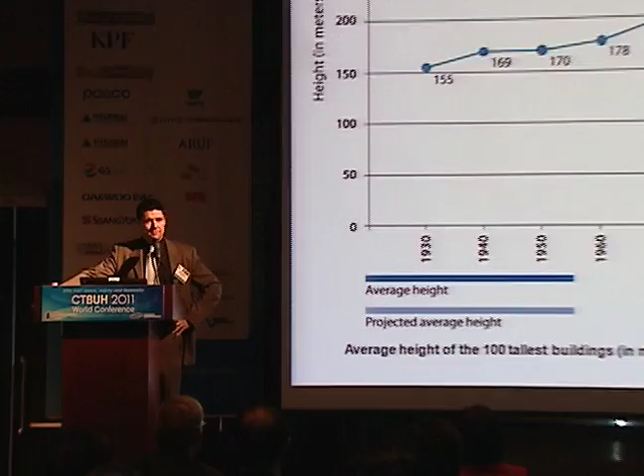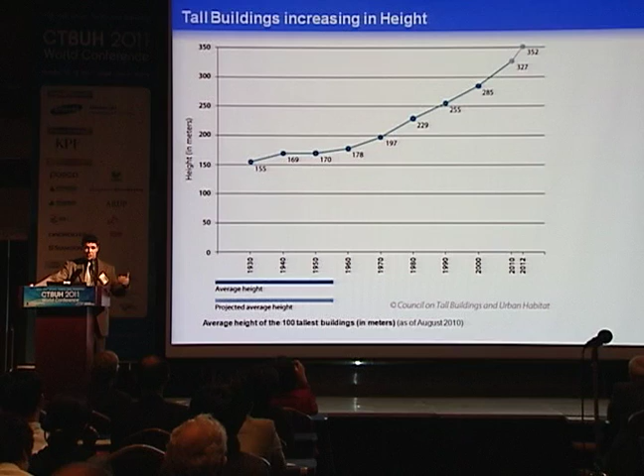So the agenda for the presentation. First of all, I just want to put this in the context of tall building trends and sustainability. Okay, two things that we all know, but here's some data. Number one, tall buildings are getting taller. That's the average height of the 100 tallest buildings per year, plotted since 1930. So we can say that the average height of the 100 tallest buildings in the world has more than doubled in that period. And we all know that the world's tallest is getting taller, but actually to double the average height of the 100 tallest buildings is a pretty significant thing.

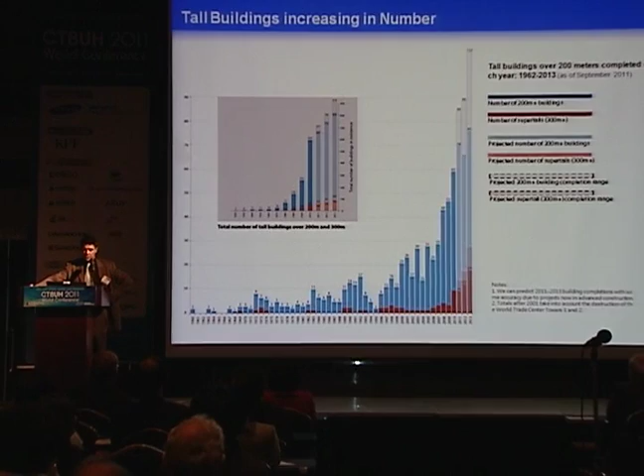Tall buildings are getting taller. There are more of them. These are CTBUH graphics, CTBUH research. That's a graph of the number of 200-meter tall buildings built every year since 1962. And actually the red shows the number of 300, so supertall buildings built. So you can see that we have been in and are still in an unprecedented period in mankind. We have never seen the amount of tall buildings that have been built and continue to be built in the last 10 years.

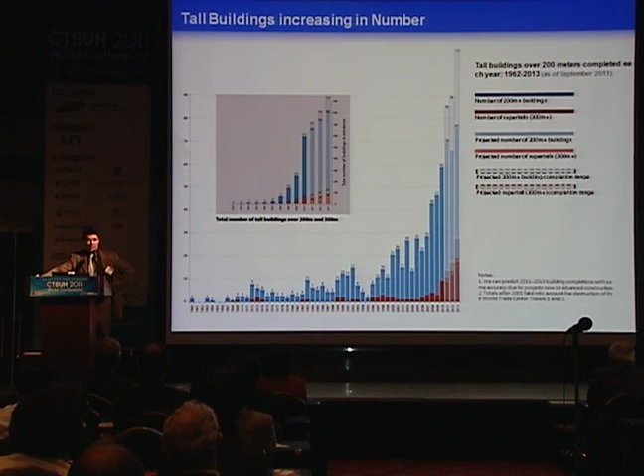And by the way, when we started predicting this about 3 years ago, we started to show a drop-off from about 2011 onwards because of the effects of the economic recession. We now no longer believe there will be a drop-off. Not only is it going to continue for the next 3 years, we believe it's going to continue after that as well, climbing in the way that we're seeing, because of the huge amount of projects that are coming online in Asia and predominantly China.

However, the age of skyscrapers is at an end. It must now be considered an experimental building typology that has failed. That's a quote from 2005. And I think probably most people in this room and in this entire conference are pretty pro-tall buildings. And I would count myself amongst them, not surprisingly.

But there's also a lot of bullshit around tall buildings. A lot of bullshit. And let me tell you that if anyone tells you that they're designing a carbon-neutral tall building or a sustainable tall building, they're actually talking bullshit. A tall building is not a sustainable building type, categorically. It costs more energy to put those materials up in the sky than it would in the low-rise realm. As a single building entity, a tall building is not a sustainable building type. It becomes sustainable when you consider the bigger picture, which is essentially beyond the single building.

We have to do all that we can to reduce the energy consumption in tall buildings. And we've just seen that with Kathy's presentation. Incredible. But that doesn't make it a sustainable building in itself. And this, I hear it daily. Carbon neutral tall buildings. We are so far from carbon neutral that it's not really even worth mentioning the term yet. And even if you do mention the word carbon neutral, you're only talking about operating energy. You're not talking about the embodied energy in the materials to build the tall building in the first place.

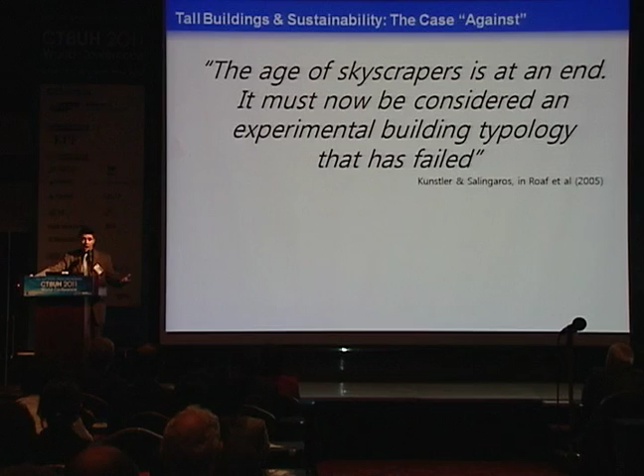So we are kidding ourselves by saying and telling our clients and the public and other people that we are on the cusp of creating sustainable tall buildings in themselves. And there are very strong arguments around the world for why tall buildings are not sustainable. I have whole lists of them, which I'm not going to go through now.

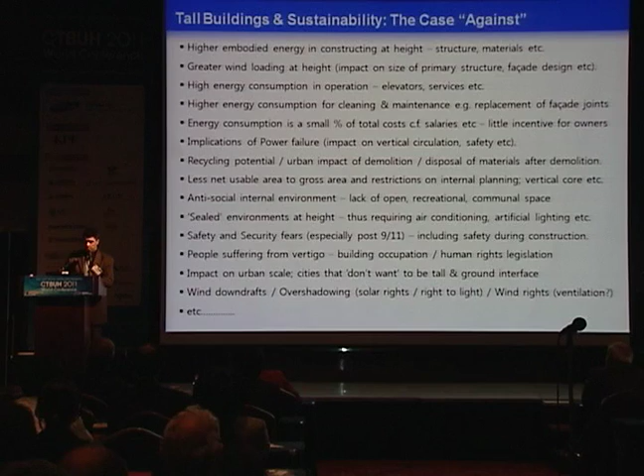They only become sustainable when you put it in the bigger picture, and the bigger picture is about cities. It's about urbanization. It's about the fact that there are 200,000 people urbanizing on this planet every day. That means we as a species need to build a new city of 1 million people every week to cope with this urbanization. So where do these people go?

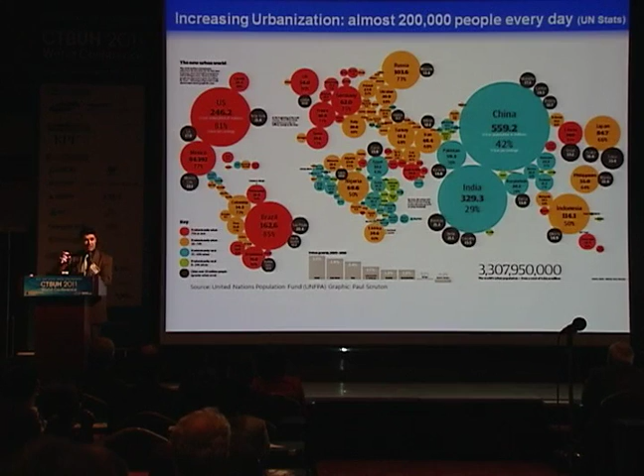And then on the other end, we've got Hong Kong. And why is Hong Kong one of the most sustainable places on the planet? Because of mass transport. Because you step outside your door and you have 6 or 7 options of moving around the city, none of which involve getting in a private automobile, or very few.

So I wanted to put that in the context before I talked about natural ventilation, because I just feel frustrated by this greenwash. I just don't think we are helping ourselves by not being upfront. And the thing that's great about Kathy Yang's project is that's the first time I've actually seen data of that nature put out there in the public realm. The projects that are investing for better environmental performance, no one's releasing the data. So there's a whole problem in the industry.

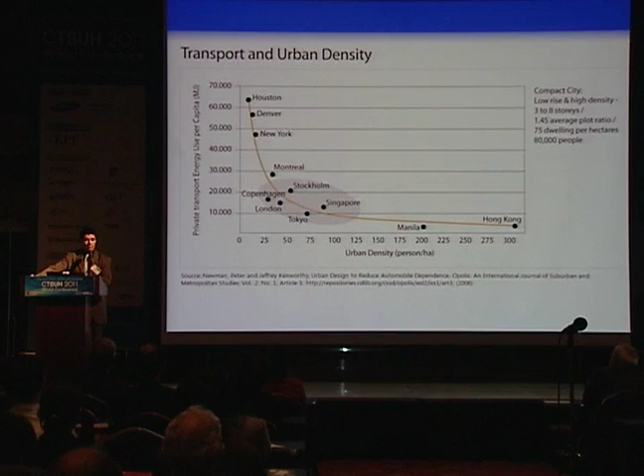Do those wind turbines on the Bahrain World Trade Center work? On the Strata building in London, do they work? Does anyone know? Nobody knows. Or maybe the people that do know aren't releasing the data.

Sorry, I'm going off on one.

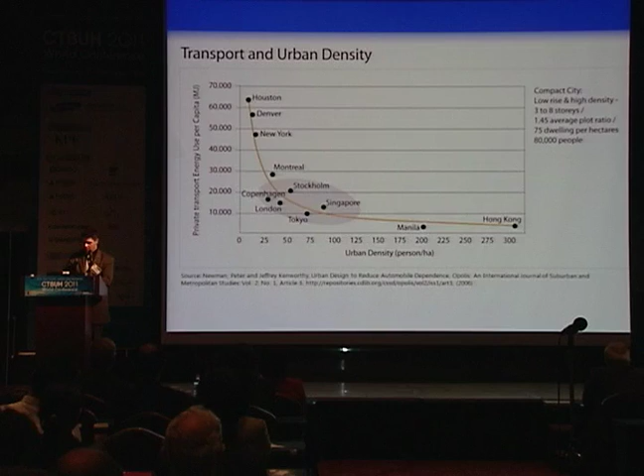Okay, so, by the way, urbanization, tall buildings, is not just about developing countries. It's not just about the 200,000 people in countries like China, India, Brazil, Turkey. It's also about the West, because the changing social demographics mean that we need far more housing than we've ever needed. In my country of the UK, we need 200,000 new homes to be built every year to cope with the supply that's needed. Why is that?

People are living longer. People don't like each other. Divorce rate is up. More single family housing is needed. So for those who think this is only an issue for the East, it's not. It's for the West as well.

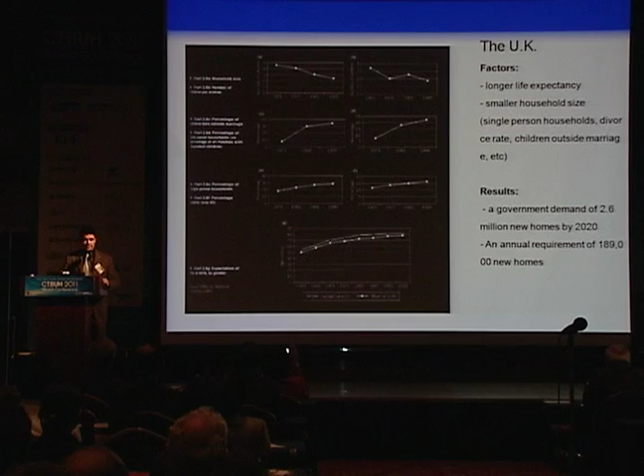Okay, calm down. Right, natural ventilation, principles and strategies. So that's a bit of a precursor to say that despite that, we need to do the best that we can to reduce energy consumption in all buildings, and especially in tall buildings. And actually, Dennis Poon showed a figure this morning that 45% of energy consumption in tall buildings is in the HVAC systems. I think in Kathy's building it was 53%. So we're talking 50% of the energy consumption going into heating and ventilation.

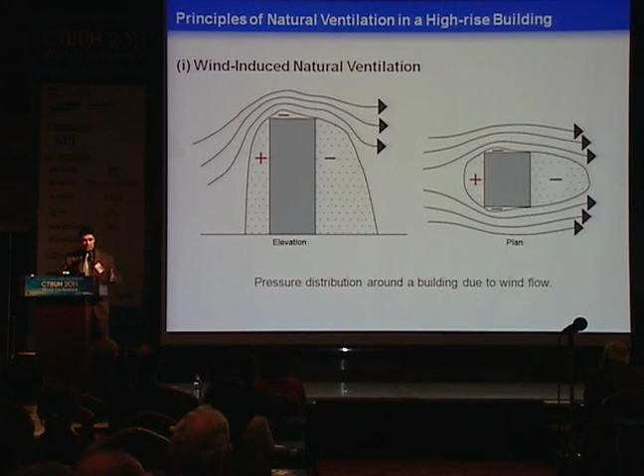I'm not going to go through this too much. Principles of natural ventilation. Natural ventilation usually falls into one of two categories, usually both at the same time. Wind-induced natural ventilation: ventilation is induced by a movement from positive to negative pressure. So wind-induced natural ventilation or buoyancy-induced natural ventilation. Heat rising.

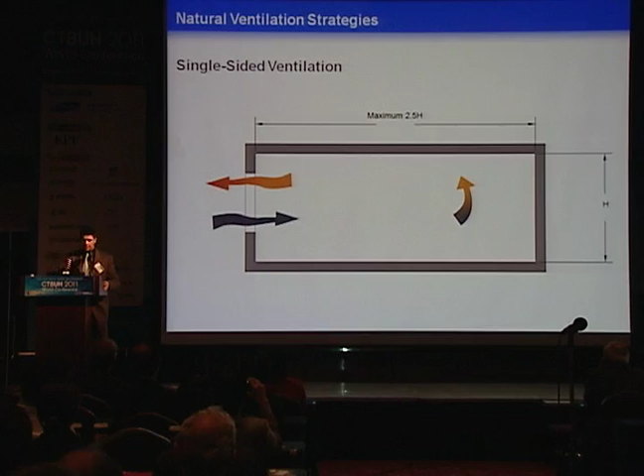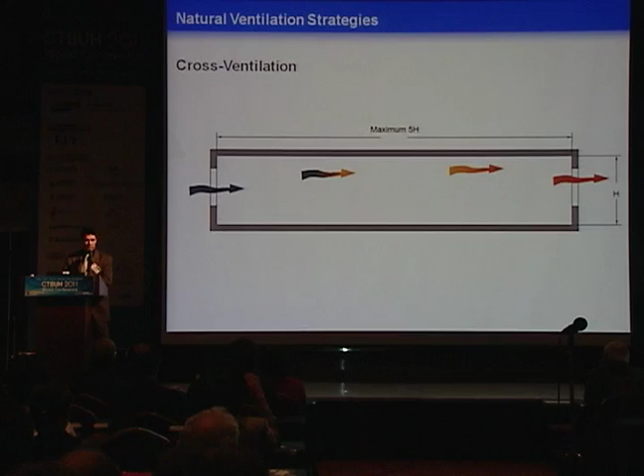And the basic principles of natural ventilation, single-sided. You can naturally ventilate a single space if the depth from a window is 2.5 times the height of the room. If you cross-ventilate, you can go to 5 times the height of the room. And then we have the principles of stack ventilation. Hot air rising and bringing the cooler air through.

I think it's worth saying that there are 3 generic strategies for natural ventilation. Or 3 objectives, if you like. One is conditioning the environment, i.e. the temperature and the humidity of the air. A second strategy is conditioning the occupant, i.e. blowing air across them, which is not the same. That's to do with evaporation of the skin and various other things. And the third strategy is conditioning the building, the fabric.

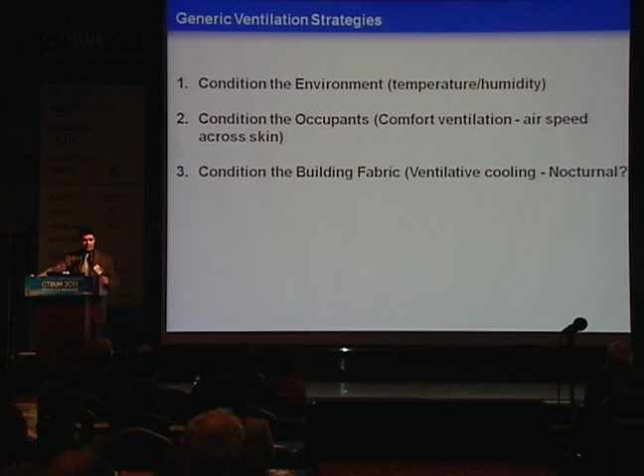Which usually translates into ventilative cooling, i.e. nocturnal cooling. What are the benefits of natural ventilation? By the way, this report focuses on case studies, and I'm going to show some case studies in a second. But the benefits. So I broke these down.

Tangible benefits. Obvious one, reduced operating energy. So we want to cut the energy consumption in the building. Number 2, reduced embodied energy. That means, if you are able to take out all the mechanical plant in the building and all the ductwork and all the rest of it, there's a huge saving in embodied energy. However, there's a question mark against that, because natural ventilation just doesn't happen without a whole other set of systems, which we're going to look at in a minute.

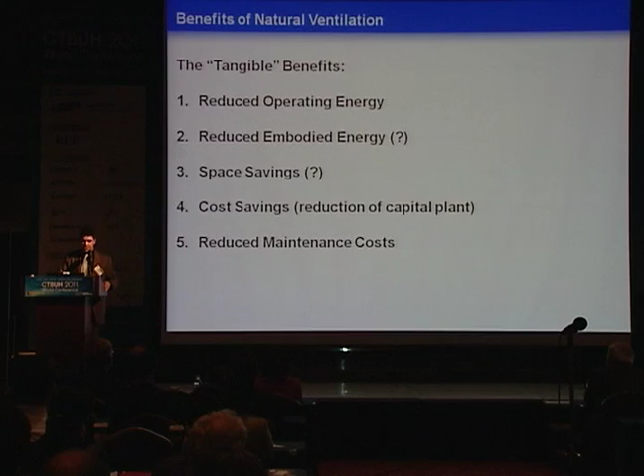Space savings. If you're reducing the amount of MEP floors, then again, that can have a space saving. But there's a question mark against it. You take out the plant, potentially there's cost savings and reduced maintenance costs. And these are all very valid points. But actually what interests me more is the less tangible aspects.

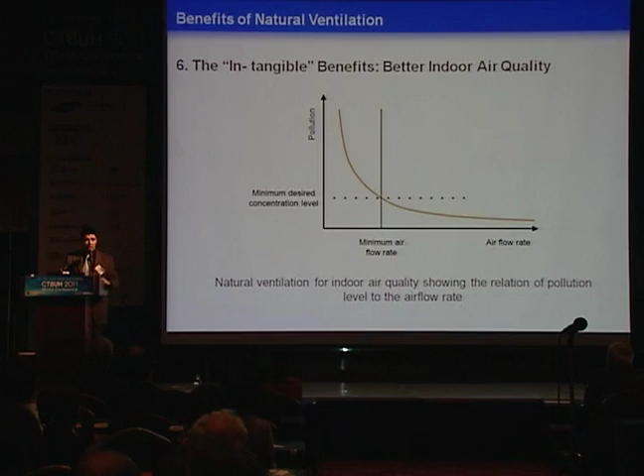For example, the impact of better indoor air quality than mechanical ventilation, because that impacts this, which is higher occupant productivity. And we are only just beginning to realize this in the industry. And this is one of the barriers to sustainability.

And it's getting better, but if you go to a client and say, I can save you 20% of your energy bill, the client will think, well, the energy cost of running my building is 0.5% of my total operational costs. But if you went to him and said, I can save 20% of your staff bill, that makes a bigger difference. And this is now becoming recognized, that approaches in sustainability, in particular making a better, greener, healthier environment, affect occupant productivity.

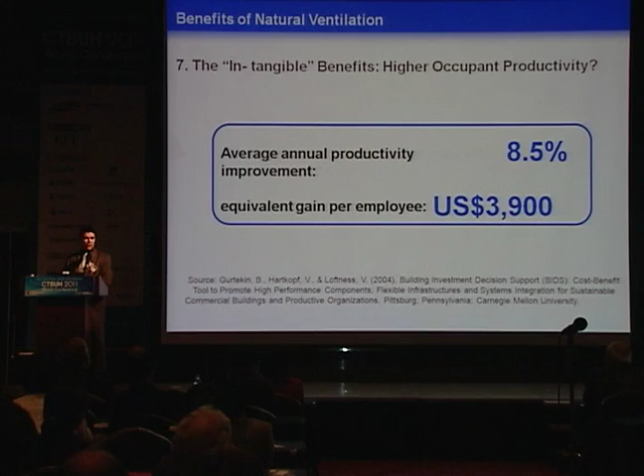And this is a little study that was done in 2004 that suggested that by creating a better environment, that impacted productivity by 8.5%, which was equivalent to a gain per employee of almost $4,000. Now, if you're multiplying this across thousands and thousands of employees, that makes a difference. Let's look at some case studies.

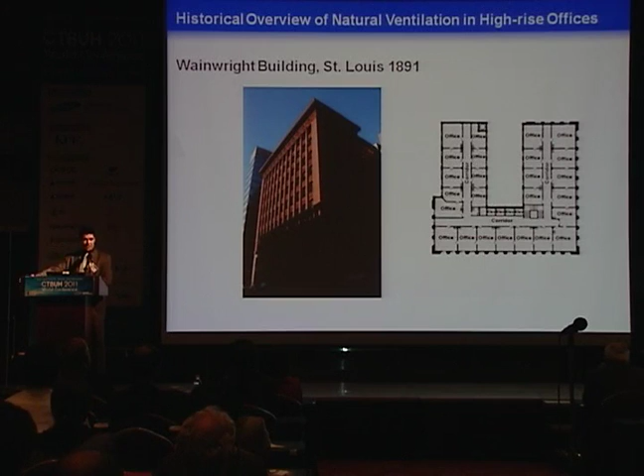Oh, historically, I just wanted to say, buildings had a natural connection with their environment. That's why, if you look at historic buildings, they had relatively narrow floor plans. If you wanted to ventilate the building, it involved the very arduous technical task of opening a window. And then even when they got deeper, they usually had a light and ventilation well in the middle.

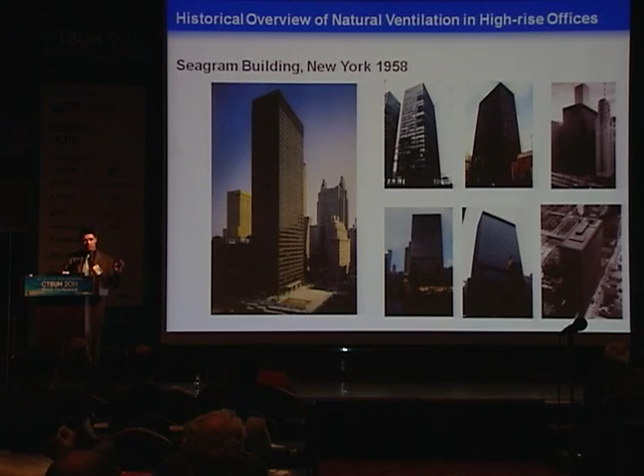And then it kind of changed with this building, with this architecture. The pinnacle of modern architecture, modernism, the ability to divorce architecture from its environment because of cheap energy. And in many respects, I think modernist architecture has been the downside, especially of tall building architecture, for 40, 50 years. That moment in time where we no longer had to consider the environment because we had the power, quite literally, to do whatever we wanted to.

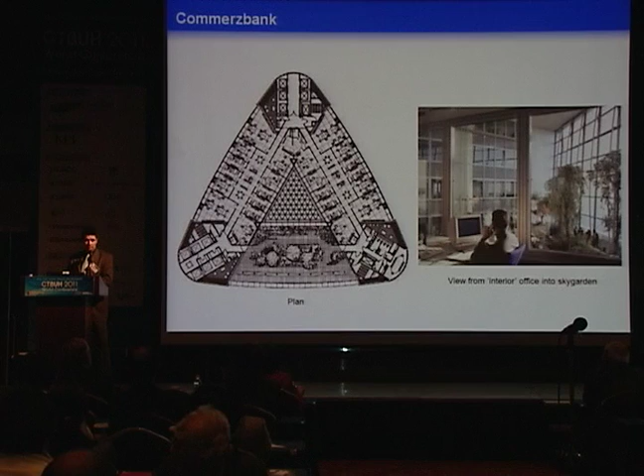Okay, so let's start in 1997 with the Commerzbank. I'm sure you all know this building. By the way, this building was driven by a German regulation saying that you needed to be maximum 7 meters from a window. So we don't need to get too altruistic about this. It was actually driven by legislation, a lot of it. But the ventilation strategy for this building, that doesn't work. Okay. The ventilation strategy for this building is very simple.

The outside offices around the perimeter are ventilated directly from openable windows at the exterior, and then the interior offices are ventilated via a 12-story high central atrium being fed from a series of sky gardens which step up around the building. So you can see that in these diagrams here.

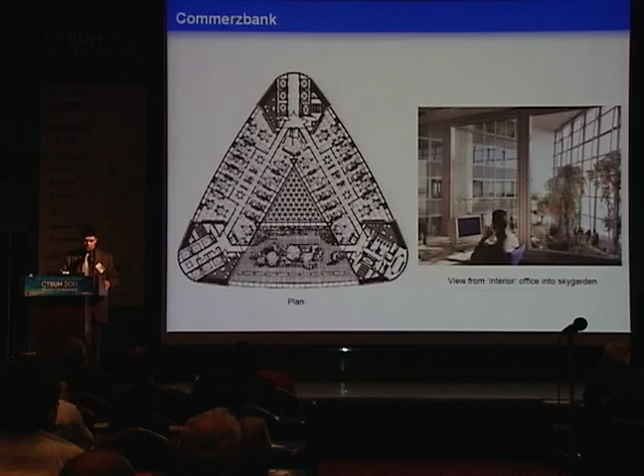If we just go back to that, you can see that what we have is, the building is divided into 12-story villages, and within these 12-story villages are 3 sets of 4-story sub-villages, such that you always have a sky garden, but the sky garden steps around in 3 places on any 4-story level.

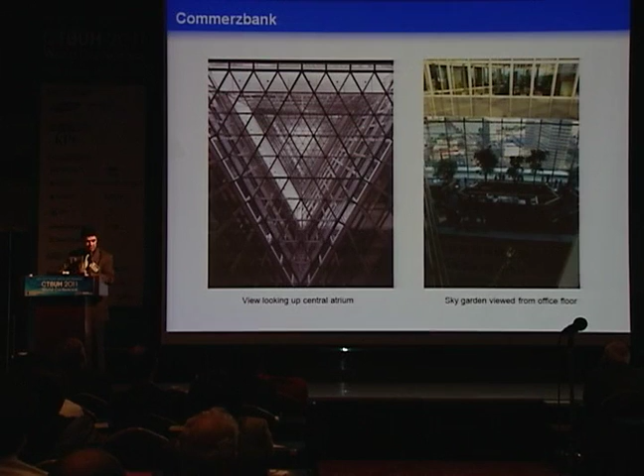And then there's a central atrium, which is capped every 12 stories. So you can see the ventilation strategy there. The outside offices are ventilated directly from the facade, and this sky garden into the central atrium is pulling the ventilation from those inner offices. The corridor in the middle is mechanically ventilated.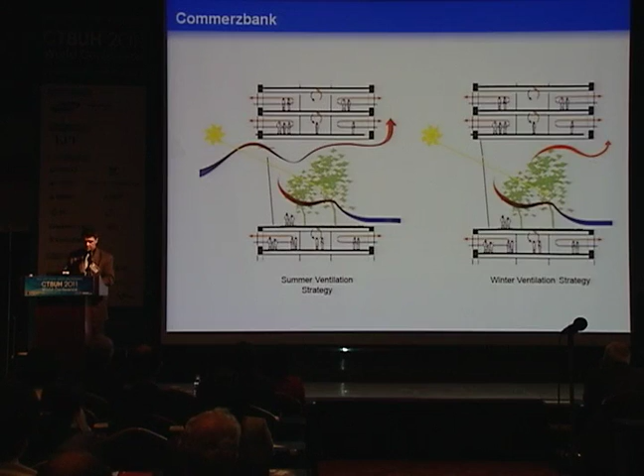So there's the outside skin. It's actually a double skin. We're going to talk quite a bit about double skins in these cases. Oh, I forgot to say, the first 4 or 5 case studies that I'm showing are all from Germany, and they all employ double skin. And you know double skin? Once you've seen one, you've seen them all. Well, you haven't. I'm going to show you 4 double skins which act completely differently.

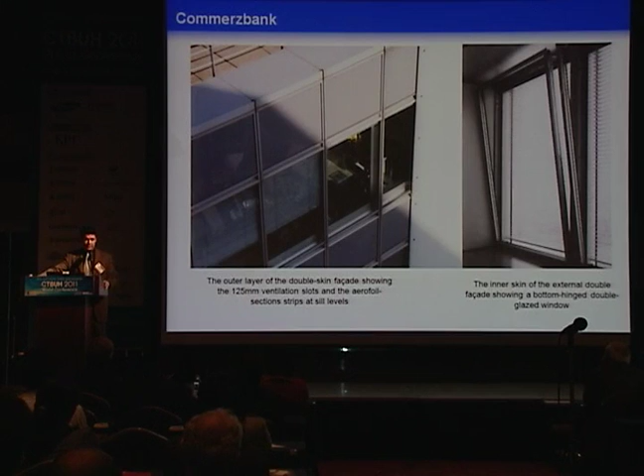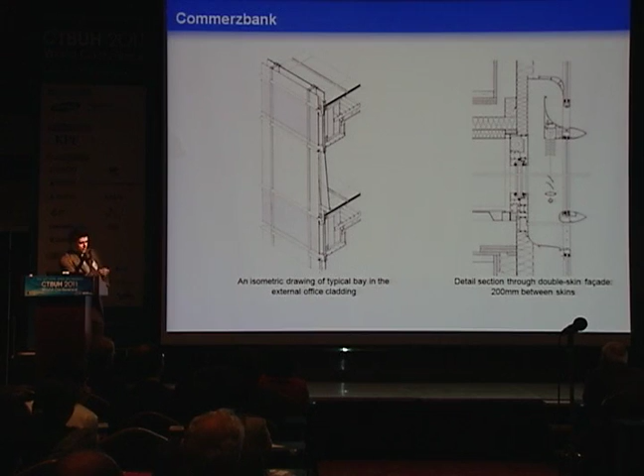So this was one of the most simple ones, 97. You can just see there. There's an outside skin, and then the inside skin just hinges forward, just pivots forward. You can see that in the diagram on the right. So the air is actually fed through these fin devices here into the void, and then the inside leaf just pivots open. In extreme conditions, it's all closed off and mechanically ventilated.

And by the way, I wanted to say that I do not know of any naturally ventilated office building in existence in the world today. If anyone else does, please tell me. There are no naturally ventilated office buildings. This is not one. They are all hybrid buildings. Hybrid means it has the ability to be naturally ventilated or mechanically ventilated.

Well, all those savings that I talked about in the first place, the saving on space and cost and embodied energy and all the rest of it, is nonsense. Because if you don't trust in the natural ventilation systems, then you are perhaps reducing the plant, but you're not even doing that because it needs to be sized on the worst case scenario, which will be a hot day in summer.

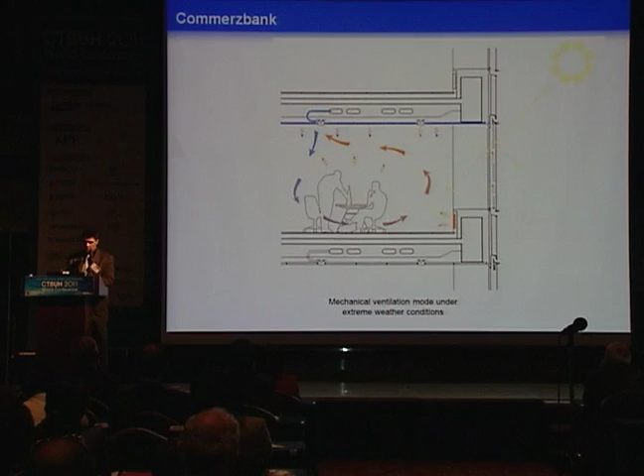So even these buildings that are brave enough to really employ significant strategies for natural ventilation, they all have the mechanical plant ready to kick in on the hottest day. So we're not really seeing this pushed to the point that it needs to be, where we can create a 100% naturally ventilated tall office building.

Okay, and by the way, I'm meant to be talking about the report. So the report goes through the case study, presents it, and then analyzes it in terms of strengths and weaknesses. So the strengths of this building: they move the cores to the outside to give flexibility of the interior space. Pretty radical approach. Most buildings have a central core.

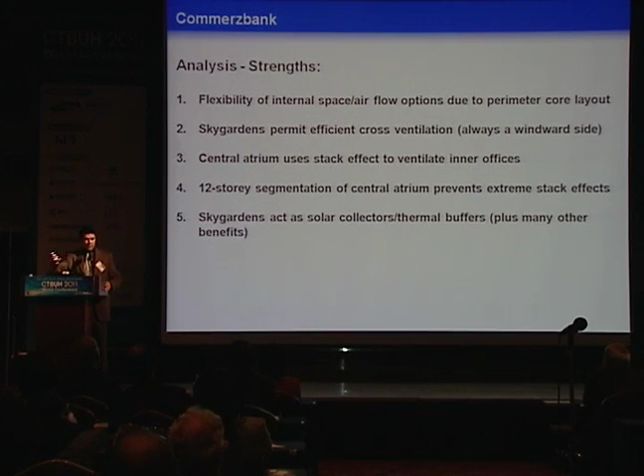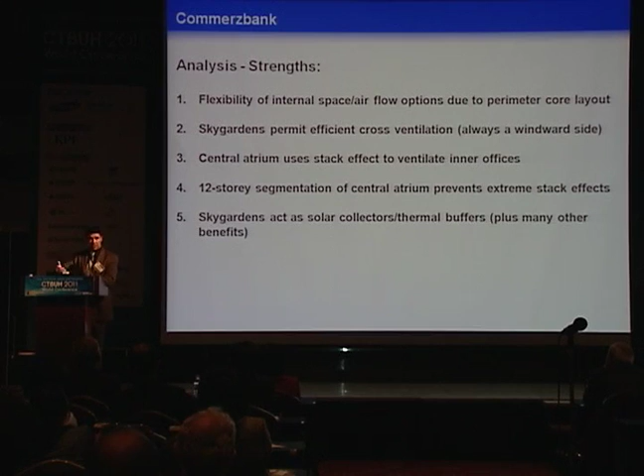Use the sky gardens to permit efficient cross ventilation. In other words, you always have a sky garden on a windward side, because that central atrium is being fed by 3 sky gardens on 3 faces of the building. So whichever way the wind's blowing, it's always driving at least one of those sky gardens. It's using the central atrium as the stack effect to ventilate the offices, yet the 12-story segmentation prevents extreme stack effects, and the sky gardens are acting as solar collectors, thermal buffers for the space inside.

Possible limitations: loss of space. Think about those sky gardens, the amount of space that those take up. I'm putting my developer's hat on now. The configuration doesn't specifically address the prevailing wind or sun. There could be uneven pressure distribution and ventilation in the offices, and possible overheating of the double skin space.

1 story high. So this double skin facade is a zone at the edge of the building. The floor comes through on each floor. And basically what it is, it's a big horizontal duct all the way around the building. And in the place where the corridor comes across, the single-story void of the facade comes into a duct below the floor. So it is a continual horizontal duct all the way around the building.

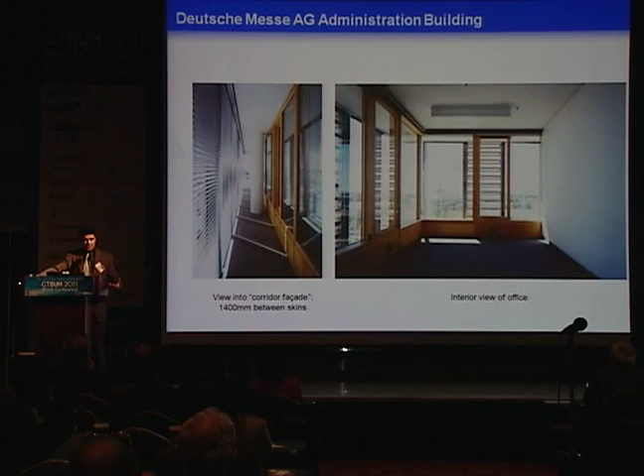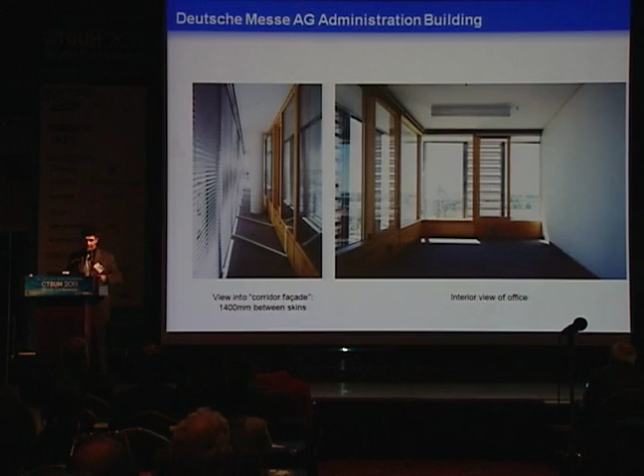It's quite nicely designed. So air comes through the facade, through louvers in the facade, into this space, and individual occupants decide if they want more of that ventilation by basically opening these sliding doors to let more air into their space. There's a mechanical system in here, which you'll see through these vents. And if it's running in a mechanical mode, or part mechanical mode, the opening of those sliding doors automatically cuts off the mechanical supply of the ventilation.

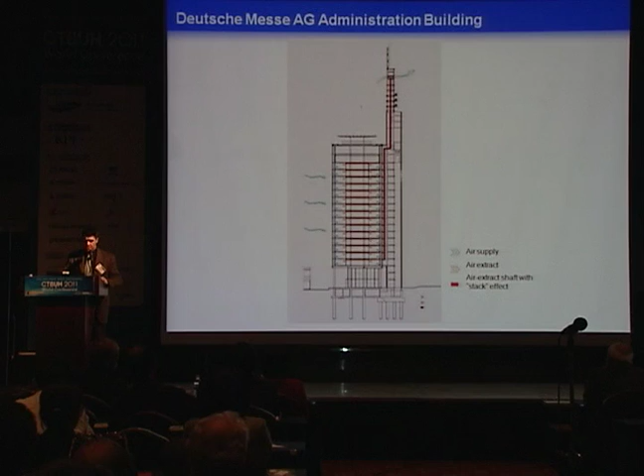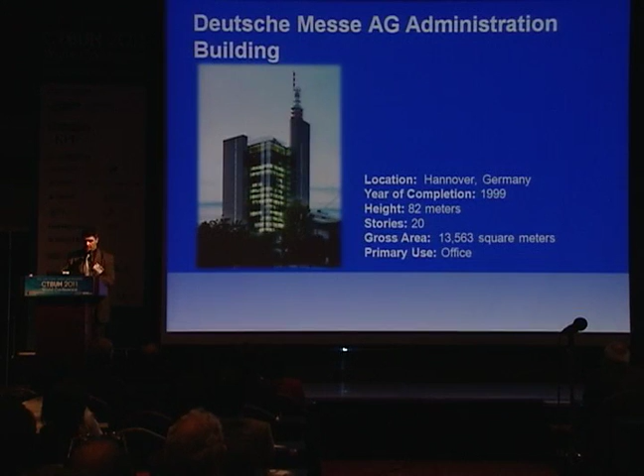And the other nice thing about this tower is that it uses the stack effect in the circulation towers to exhaust the air. So we've only spoken about the supply coming in through the ventilation and then through the openable, slidable doors. But it's then drawn through the building and into this tower. And that tower extends higher than the building and is drawn off through the stack effect acting in that circulation tower. So you see the vents on the outside of the building.

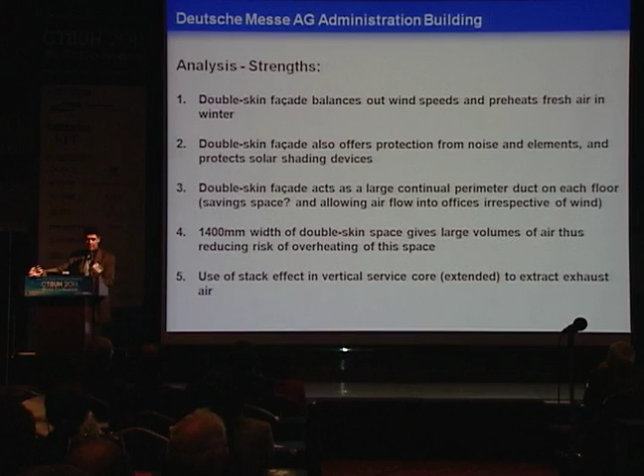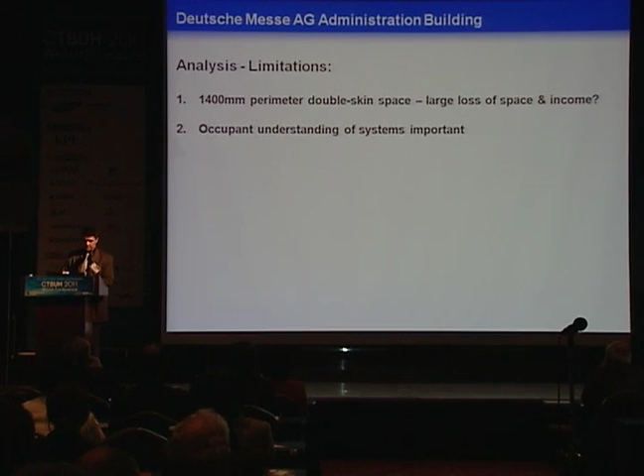And you know what, I'm going to speed up. But hey, there's a whole bunch of good things about double skin facades. They protect from the noise and the elements. They temper the space. They do all this. But it's still 1,400 millimeters of non-usable space on the outside of the building. That's a hell of a lot of space. And also, occupant understanding of the systems is pretty important for operation of that space.

Deutsche Post, around the same time, again in Germany, a double skin facade, but a different double skin facade on the north and south side of the building. So on the south side of the building, where the solar gain is higher, you have a kind of shingled facade, where the air is coming in underneath these overlaps in the facade. And by the way, this is not a single story. This facade now is 9 stories high, so it's broken down into 9 stories. So another double skin facade, but working in a completely different way.

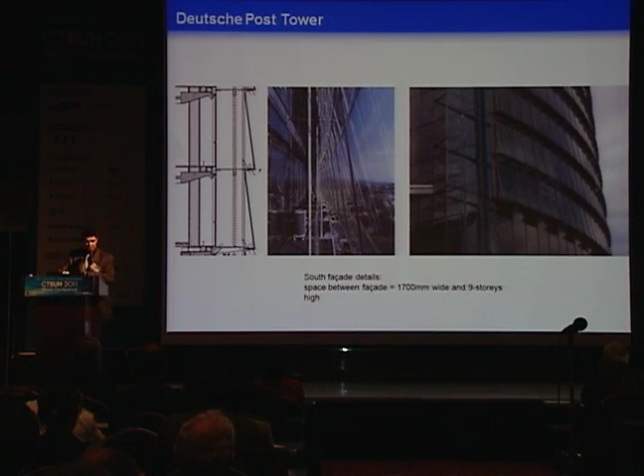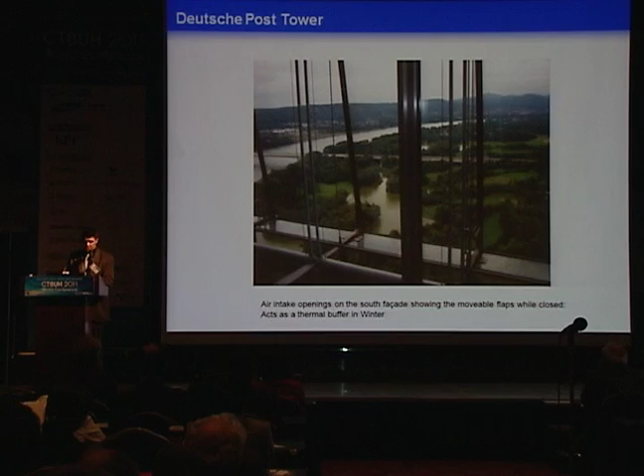The air is drawn into the facade differently on the north and south sides of the building. So this is the north side, where you'll see it's a flat facade. It's not shingled. It's not overlapping. This is back to the south side. So those glass horizontal flaps lift up there and can be controlled to let greater or lesser air into that tempered space and then being drawn into the offices. There's a section through.

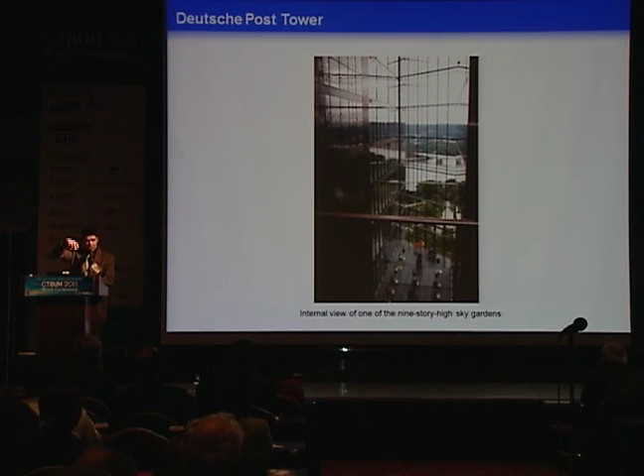And then it's being extracted through these 9-story sky gardens, which are stacked up on top of each other at the center of the building, which are then in themselves naturally ventilated. So you can see there the 9-story sky gardens, which are acting as big exhaust ducts, really.

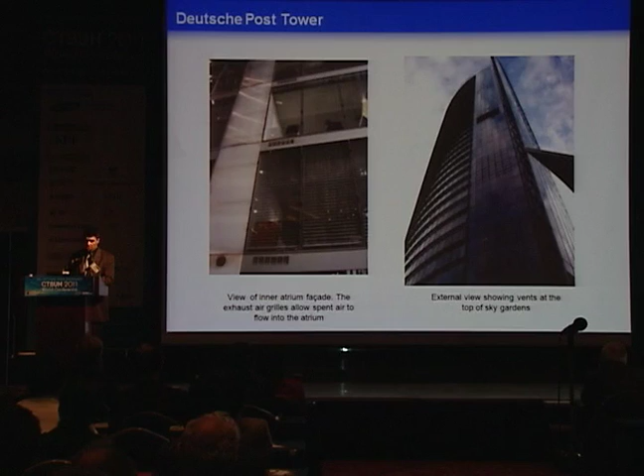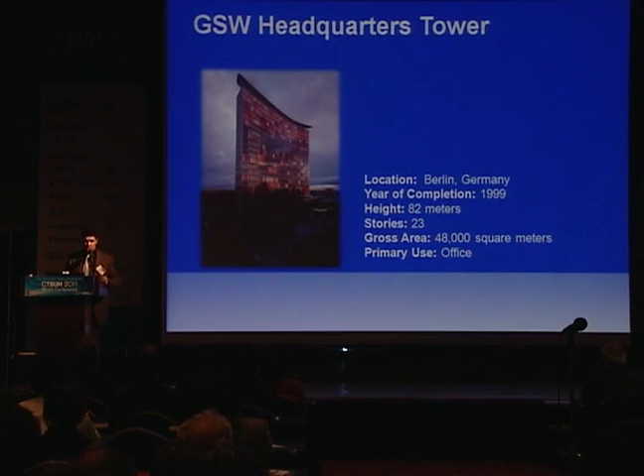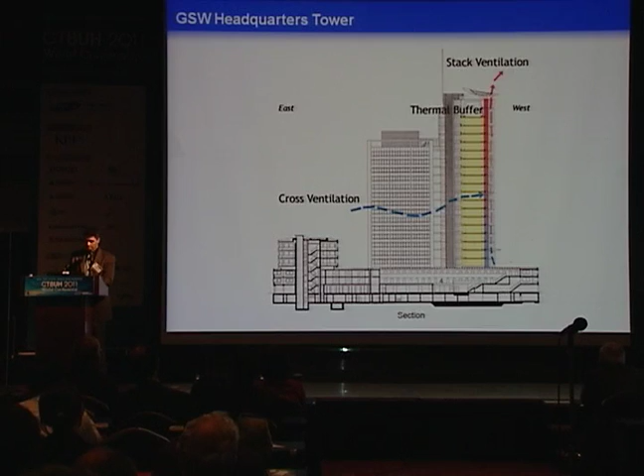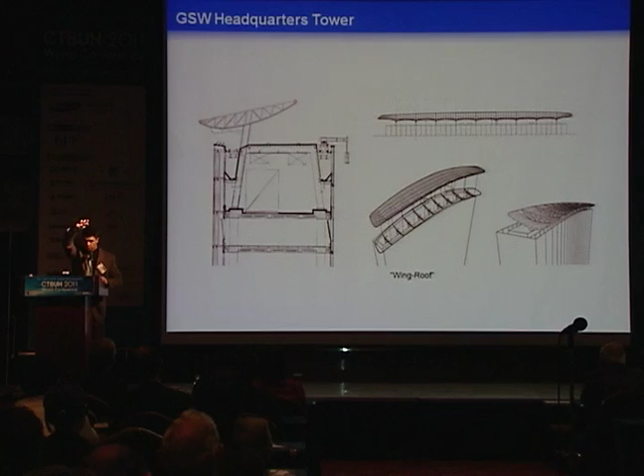The next few examples, I just show you some things that are different. What I'm trying to show you is that there's lots of different strategies for naturally ventilating tall buildings, even with double skin. So the GSW tower in Berlin, that west-facing double skin facade, now the cool air is being drawn in from the other side of the building, and it's acting as one big stack effect. So they're encouraging the sun to come into that space and bring the stack effect out through the top. There you see that. They then even put this wing roof on the top to attenuate the wind pressure, bringing the exhaust air up through the facade.

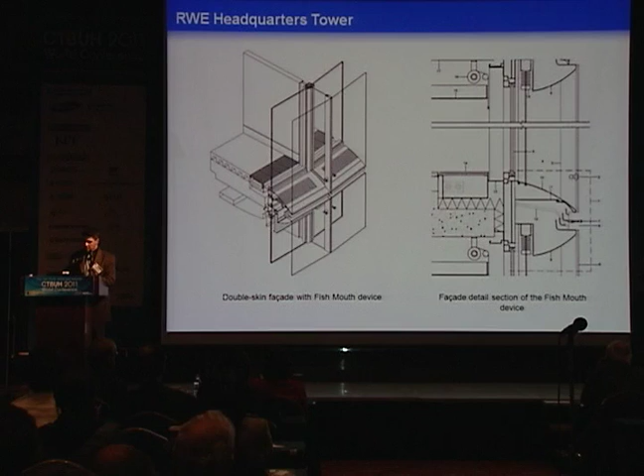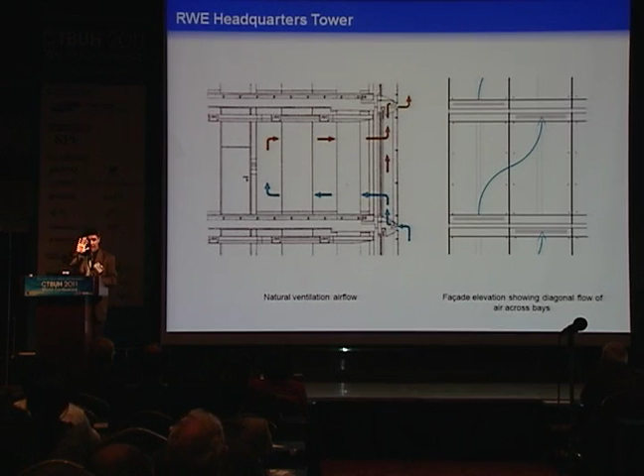RWE headquarters, a completely different approach again. Similar in the double skin facade and this fish mouth detail of letting the air come through the kind of mullion arrangement. But then one panel is about air supply and the adjacent one is about air exhaust. So the first project I showed you was one big horizontal duct all around the outside. The second one was vertical ducts 9 stories high. GSW's one big kind of solar chimney facade at the edge. This one's using a different strategy, each panel for supply and extract.

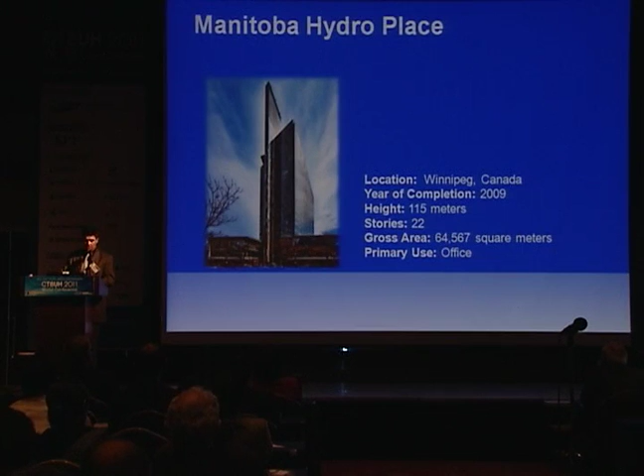Manitoba Hydro Place, again, has a completely different strategy. And this is interesting because this is in Winnipeg, you know, where it goes from -35 to +35. And one of the interesting things about Manitoba is that it uses a water feature in the building to humidify or dehumidify the air. And then you have this solar chimney, which is extracting the air again.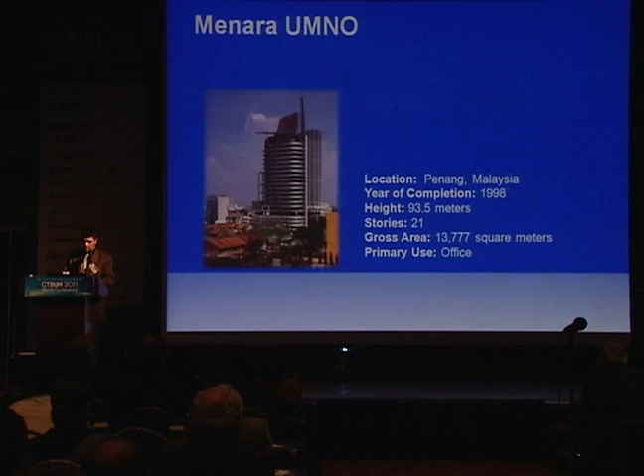Speeding up. Menara UMNO, completely different. This one uses wing walls to encourage wind to come through.

By the way, I heard that.

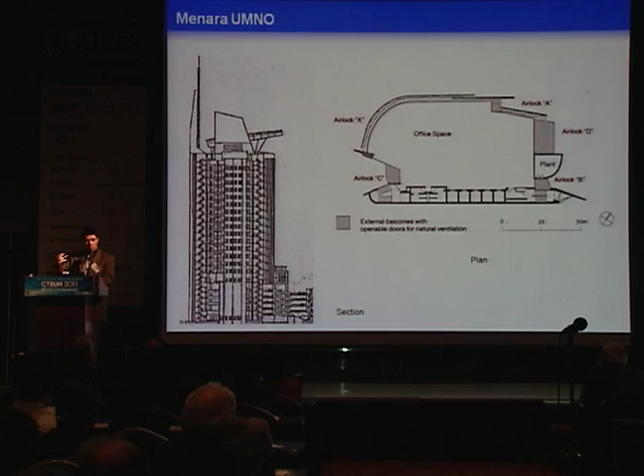I heard it. To encourage wind to come through, so it's ventilating the occupants directly. By the way, I just cannot see this building work. This building just cannot work. You know, it would have to have such a high ventilation rate that it's going to be flapping papers all over the show. So there's no way I think this building could work.

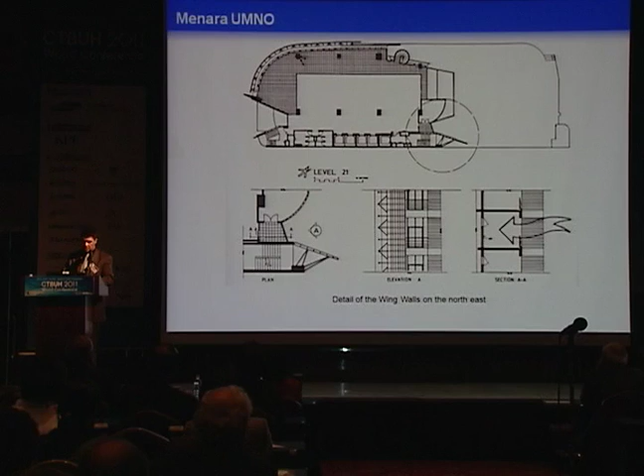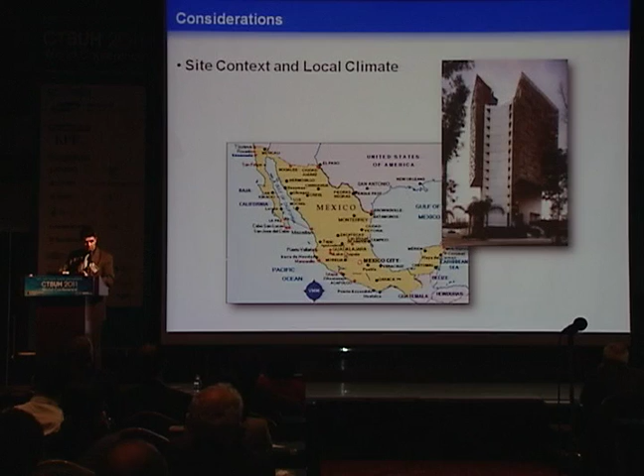So, back to the report. So the report goes through these case studies and then it draws out a number of considerations and then makes recommendations. And the considerations are things like, you know, there is no one solution. And by the way, I only showed you some of the case studies. This is another one in Central America. You know, it's about solutions that are appropriate to this context and climate. This is an important one.

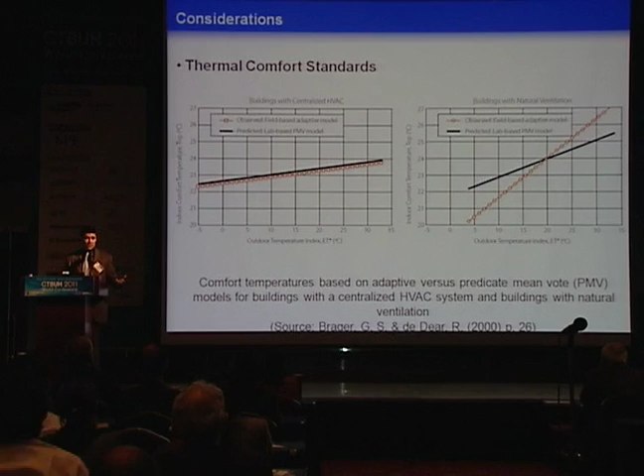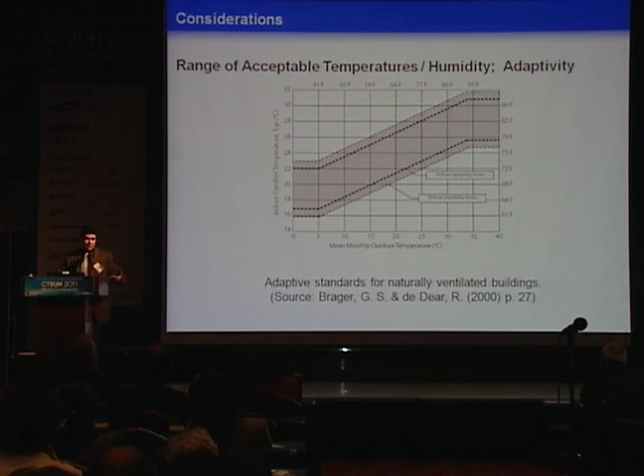Thermal comfort standards. This is really quite important because we as a species have become so attuned to mechanical ventilation that a 1 or 2 temperature differential and we're like, oh, it's freezing cold or oh, it's boiling hot. You know, we've lost the ability to adapt to our environment. And studies have shown that in cases of natural ventilation, we become far more tolerant, which actually is something that we need as a true response to sustainability across a whole manner of things. So we need to change our attitude towards what's acceptable in tall buildings because we can do it as a species. So there's a whole bunch of other considerations, but let me just move to the conclusions.

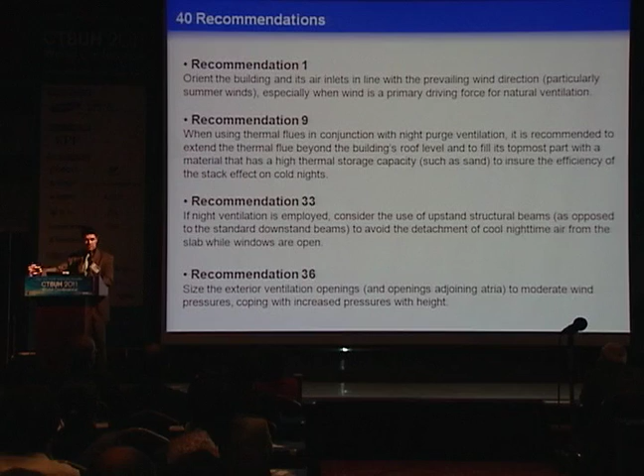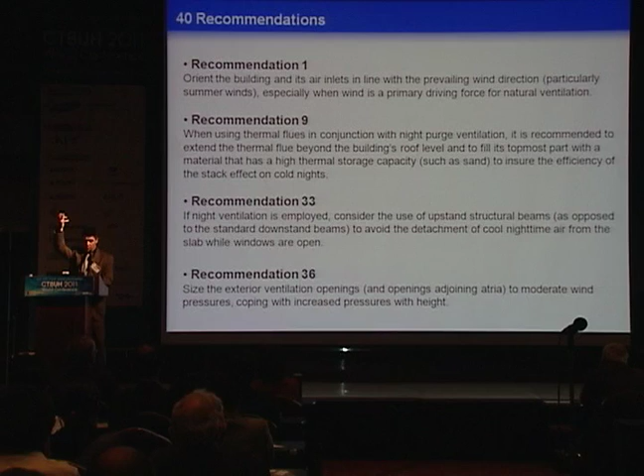Sorry, recommendations. So this report makes 40 recommendations, and some of them are quite simple, such as orient the building in line with the prevailing wind direction to maximize wind as a primary driving force. And some of them are quite detailed. Like when using thermal flues, it's recommended to extend the thermal flue beyond the roof level and fill the topmost part with a material that has a high thermal storage capacity so that the stack effect can still work on cold nights. So I only show a few of the recommendations there.

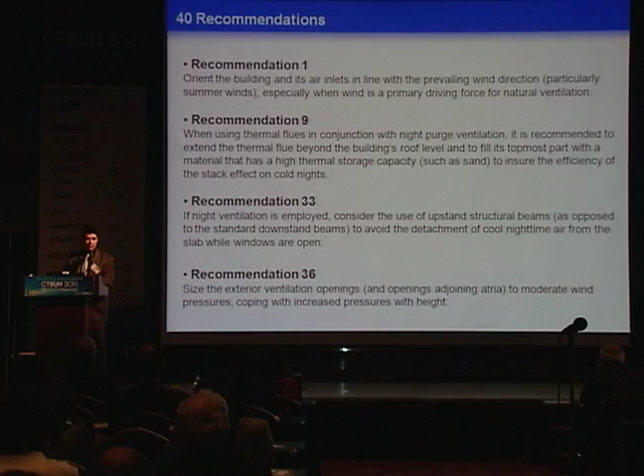Basically, this presentation is saying, wait for the report. So it'll be out in July 2012. We have a deal with Taylor & Francis, so we're going to be publishing this widely on bookshelves around the world. I want to acknowledge many of my colleagues, some are in the room now, who have peer-reviewed this report and will be peer-reviewing it again before it goes for final publication.

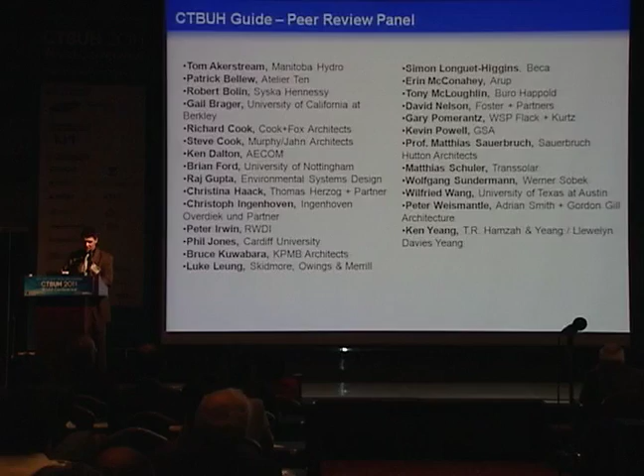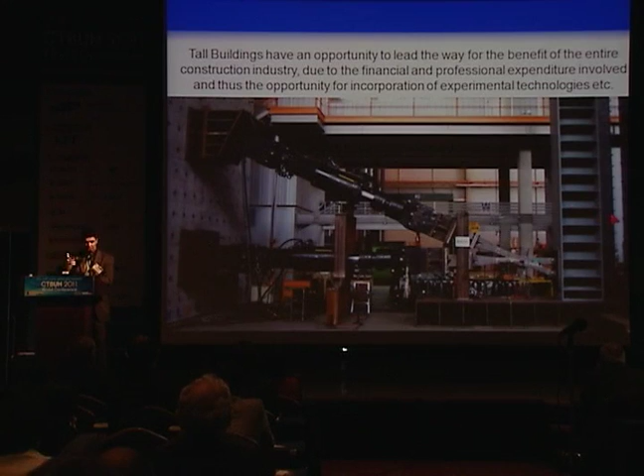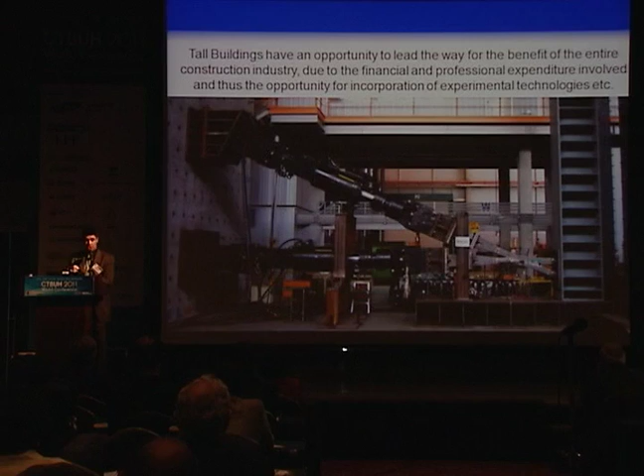And in tall buildings, because of the scale of them, because of the investment, professional, time, financial, we are able to test things and incorporate things in an experimental way that we are not able to do in small buildings because there's just not the budget for it. And this is why tall buildings have the opportunity to show the way for the benefit of all buildings because of the investments in them. Thank you.

Thank you, Antony, for again a very passionate and inspirational presentation. By the way, this is just the output of one of the working groups of the Council on Tall Buildings and Urban Habitat. There are many. If you go onto the website or you come to us, we can tell you what working groups we have, and I think it's a great opportunity to share your knowledge and insight to make the tall building world just a little bit better.